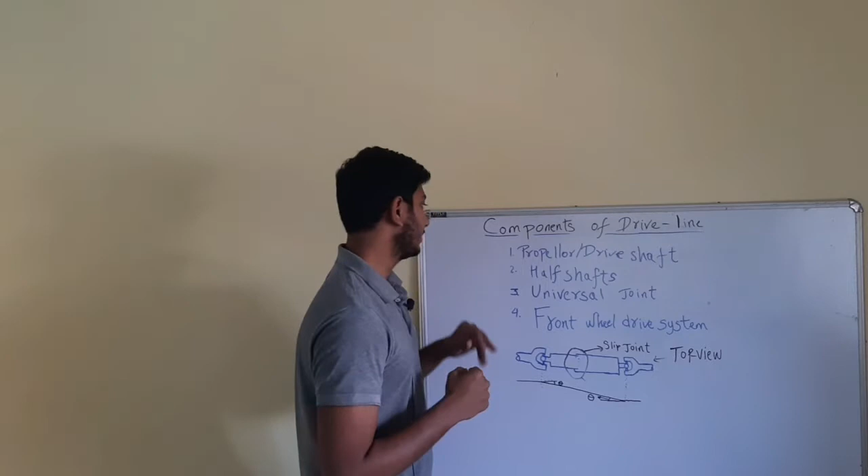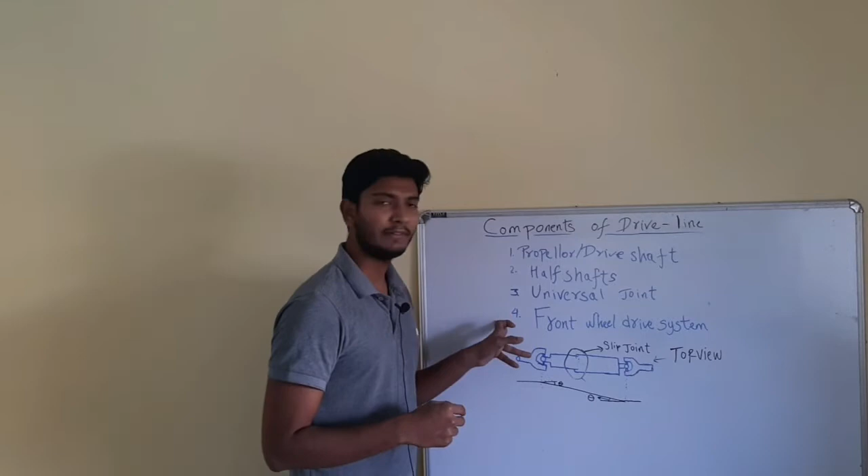So today we will be discussing about propeller shaft or drive shaft. It is commonly known as drive shaft. Then the second component is half shafts. Third one is the universal joint. Fourth one is the front wheel drive system. I will just give a gist of front wheel drive system, and this is the part of a driveline system which I will be explaining to you. So let us start with the propeller shaft or drive shaft.

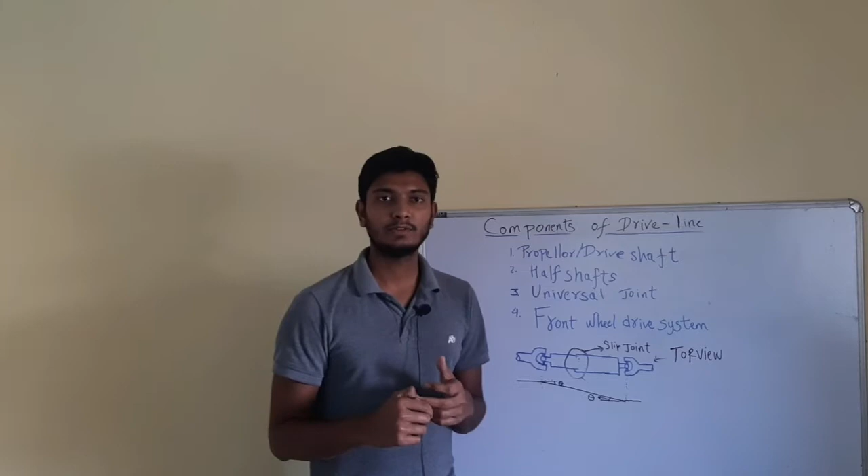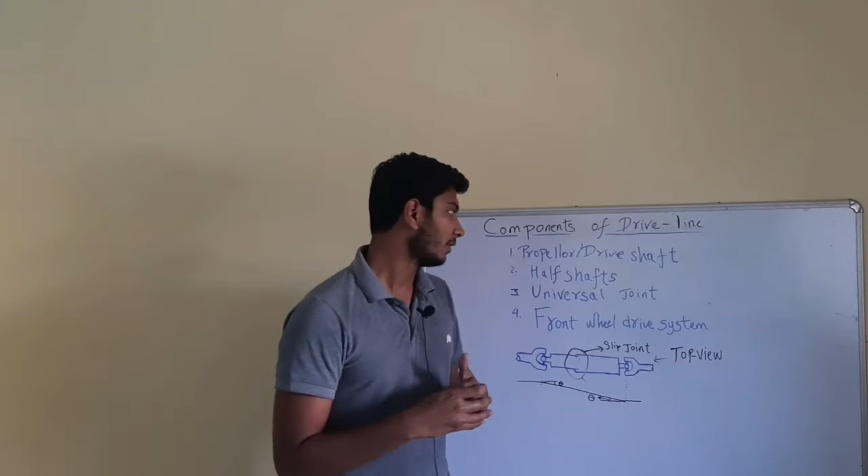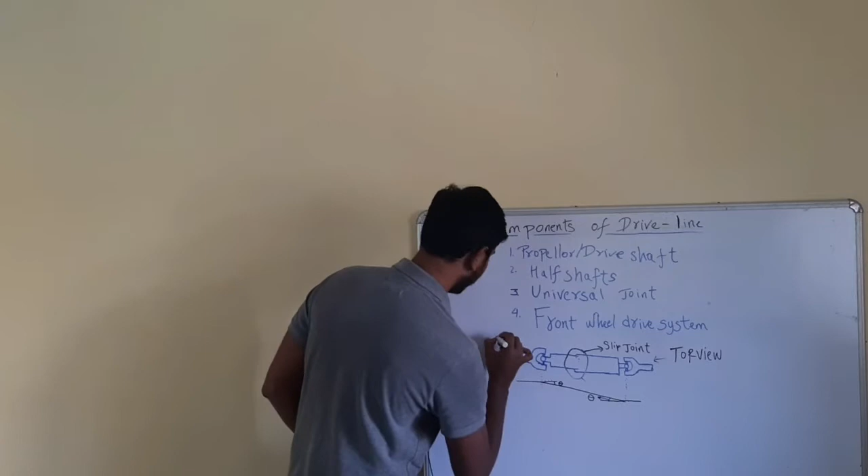A propeller shaft is a component which connects the gearbox and the differential system or the final drive system. So this is the main component which joins both the ends of the system. So let us see the construction of this. This side, let us assume that it is the gearbox side, and this is the final drive side.

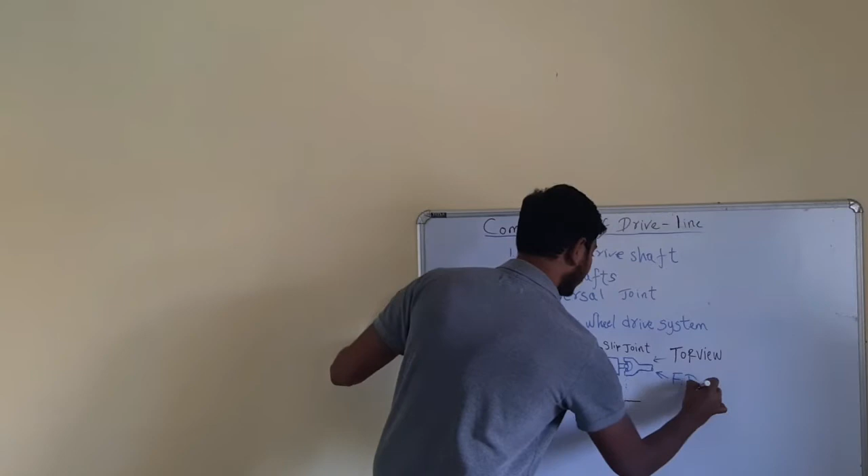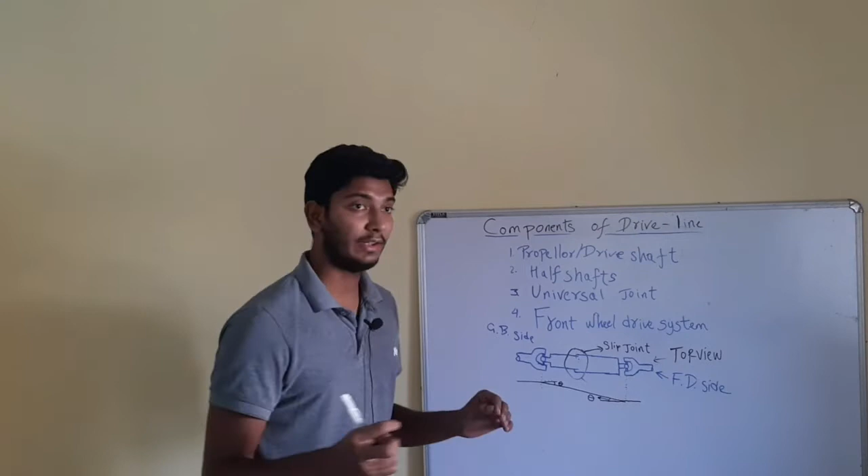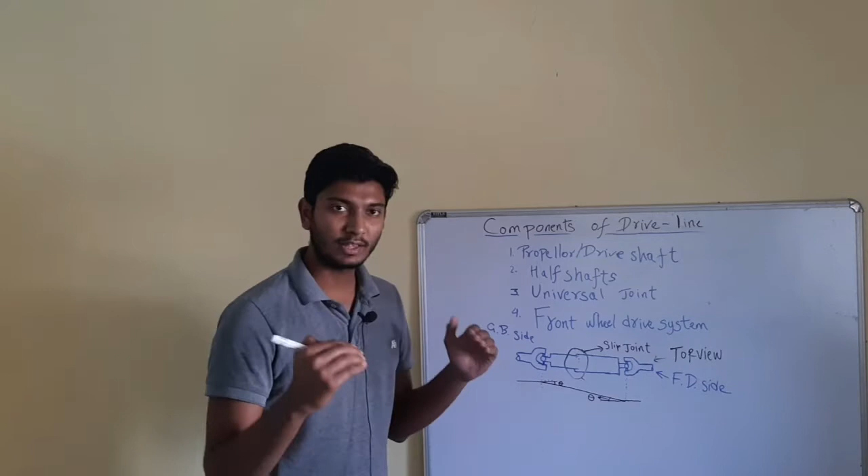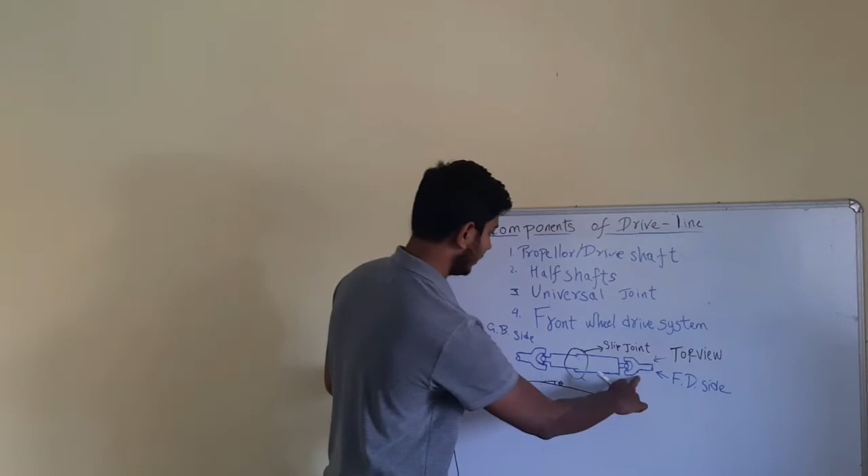So this is the gearbox side and this is the final drive side. Okay, and this is the whole construction of propeller shaft. Now, if we imagine that the wheels are on the ground and the gearbox is on the higher side from the ground, then they both are parallel, but it is not possible for a shaft to connect this way or in transverse way. So they have used two universal joints on both the sides, so that we can transfer the power.

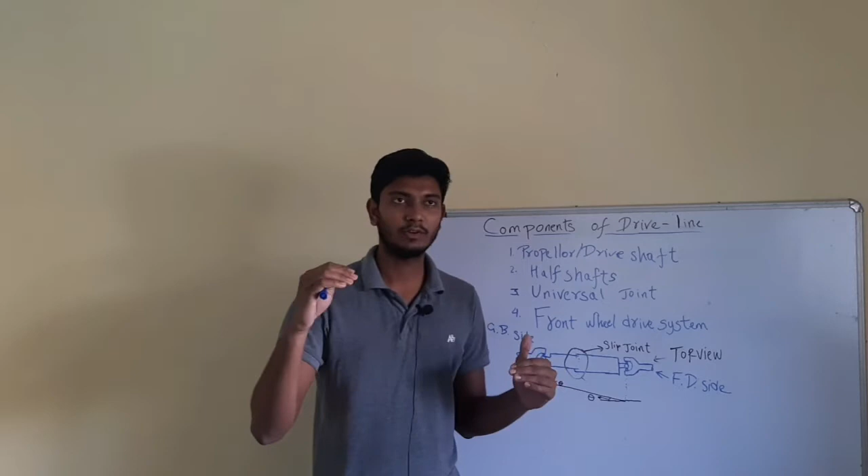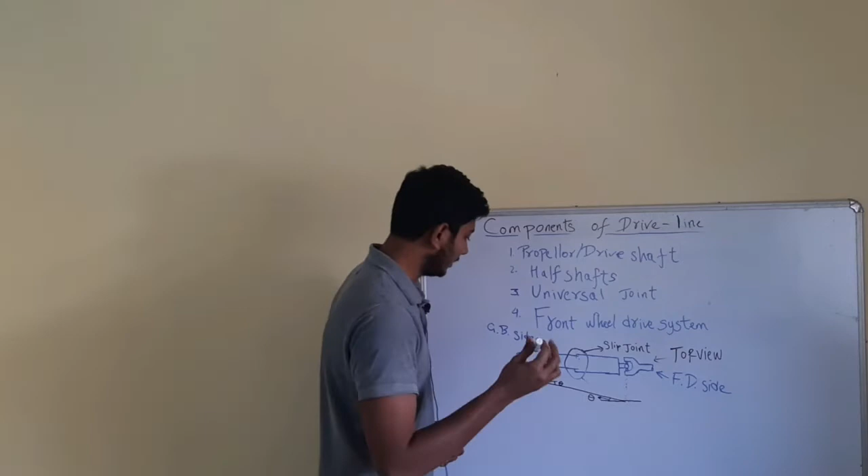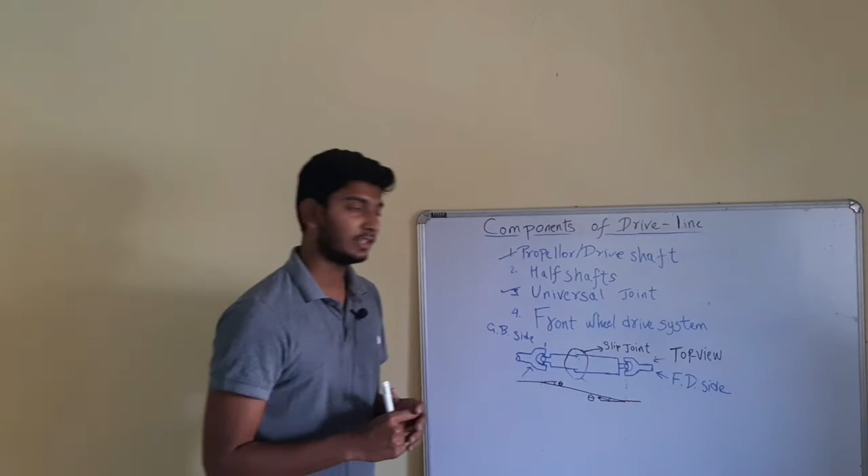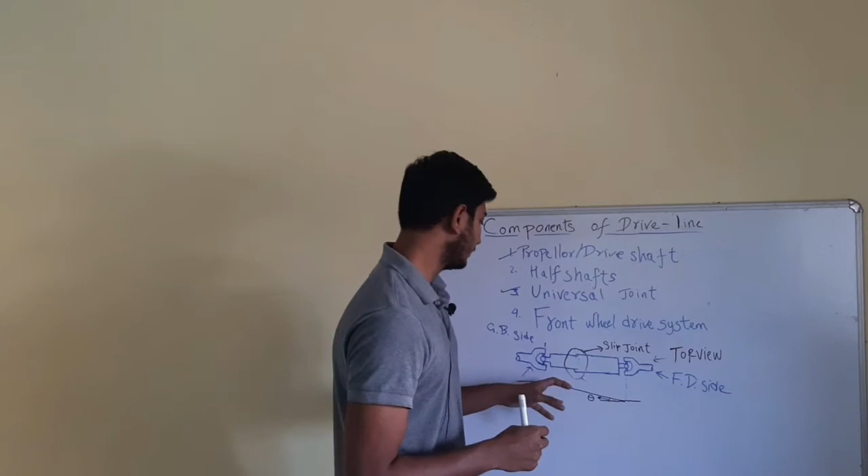Both these sides are offset at some distance. So both these joints allow the power to be delivered from one parallel line to another parallel line. Okay, so this is a fork-like structure. This is the universal joint, and this whole is known as the propeller shaft. Now, both these angles should always be constant. Otherwise, we would be finding the speed difference. We would not get the desired output of the speed which we want. So for that, both these angles should be constant or should be equal.

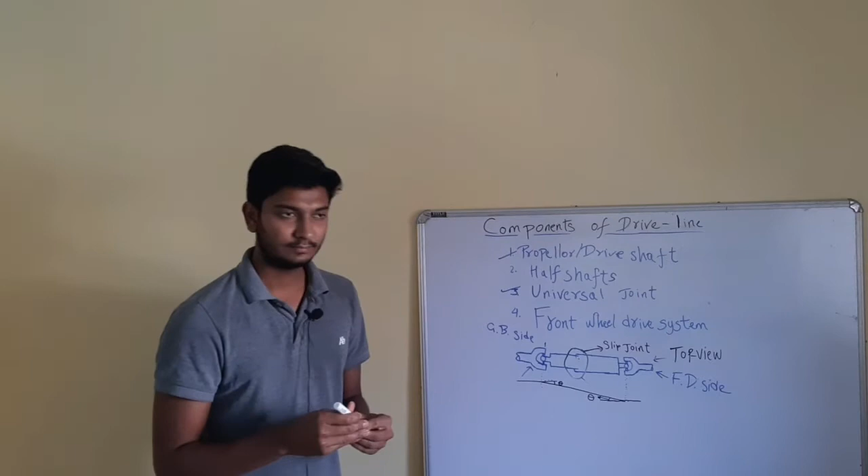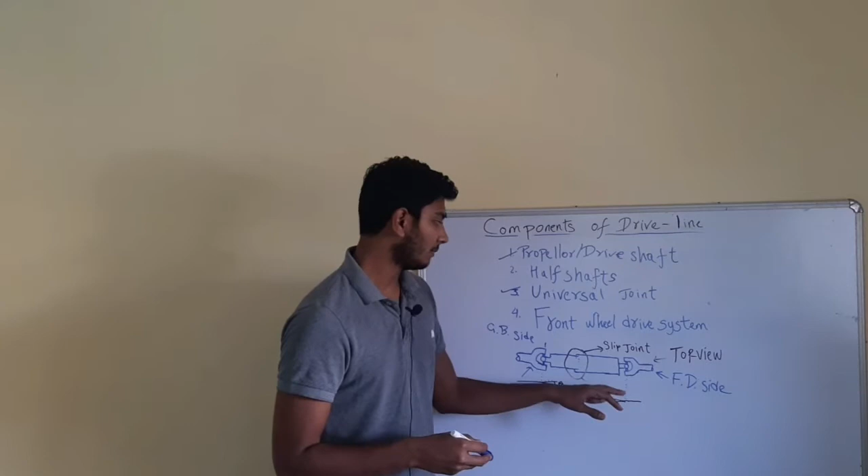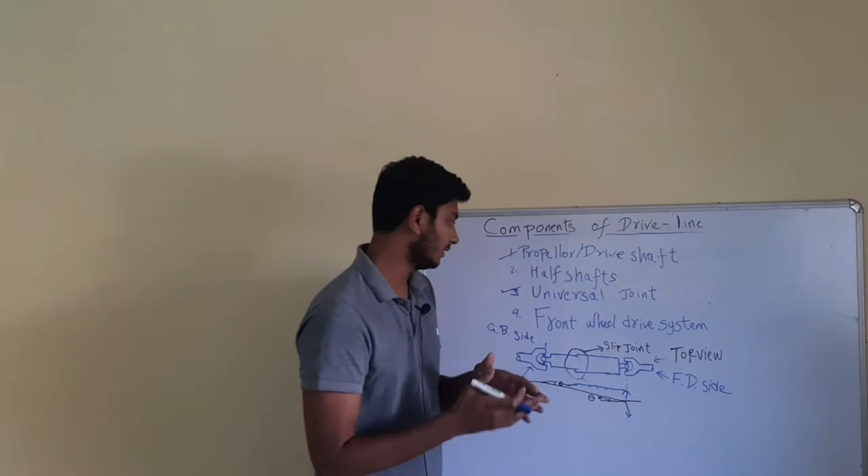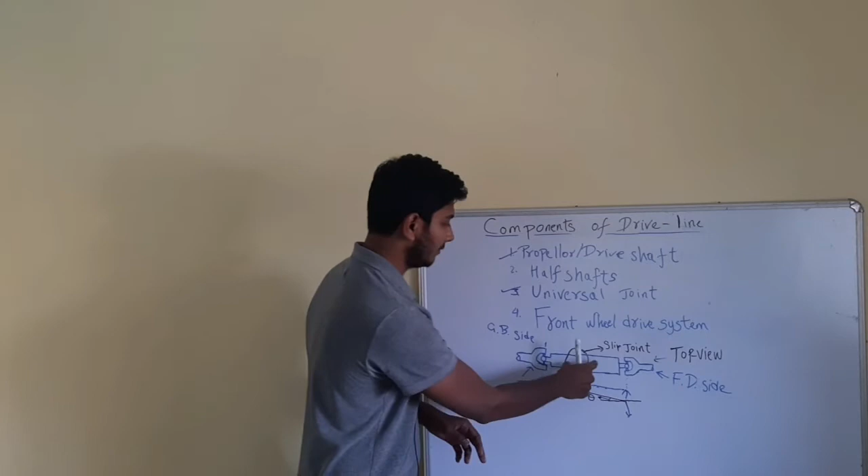Now, another thing, we have seen that the wheels of the vehicle constantly move according to the potholes and many other deformities of the road. So what about that? This will always be traveling in this confined path only. So if there is a bump, this would move upside, then this would be the shaft. Now this length and this length would definitely be different. So for the compensation of this length reduction, and to keep these wheels in the same plane, we have introduced a slip joint in between both these universal joints, which is the propeller shaft itself.

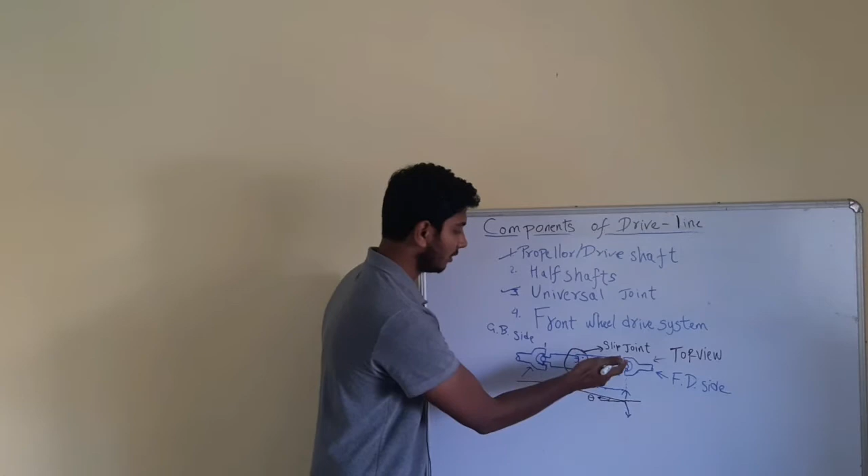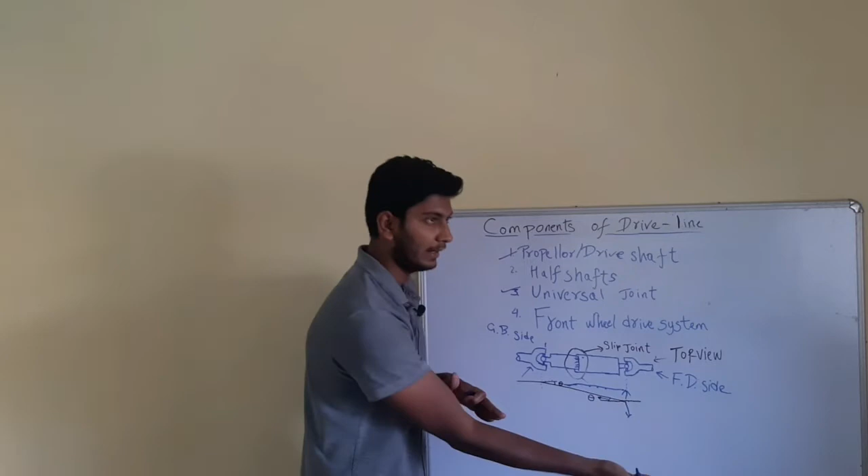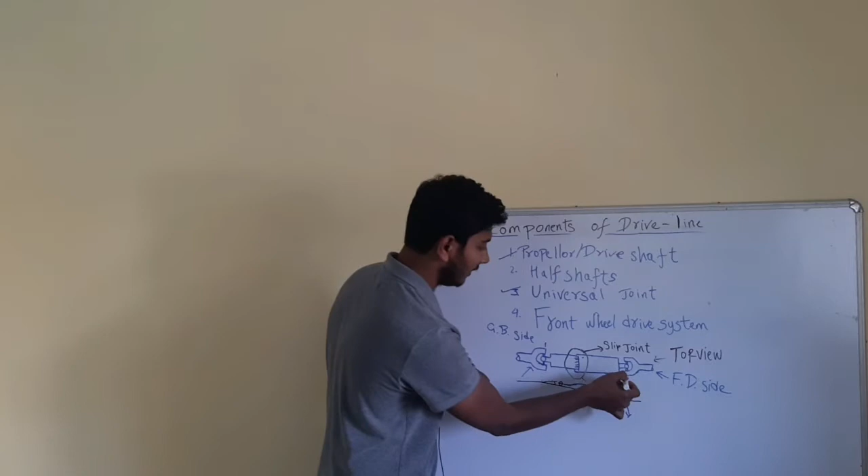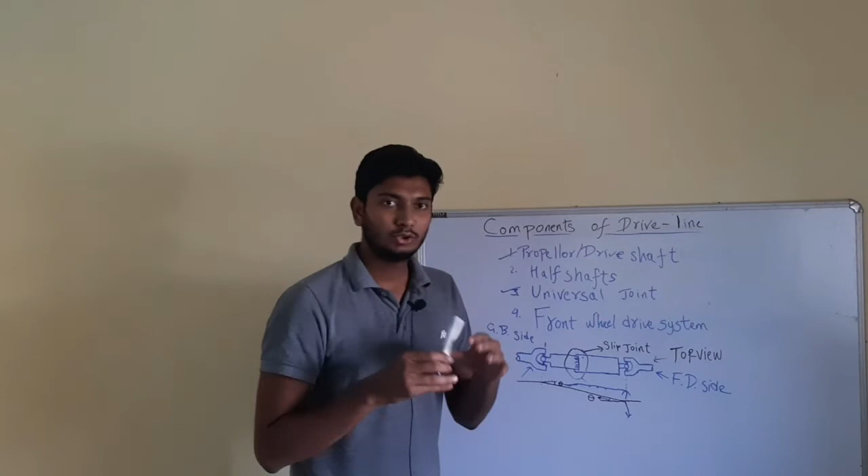Now here, this side of the propeller shaft is solid and this side is hollow. For simplicity, for this diagram only, in real life it may be different. So this is the solid side, and this is the hollow side. Now, if there is any bump in the road, then the wheel would lift up. So this shaft will also lift up, and this structure is like a sliding joint. It's like two shafts sliding over each other with the help of this structure, known as spline structure.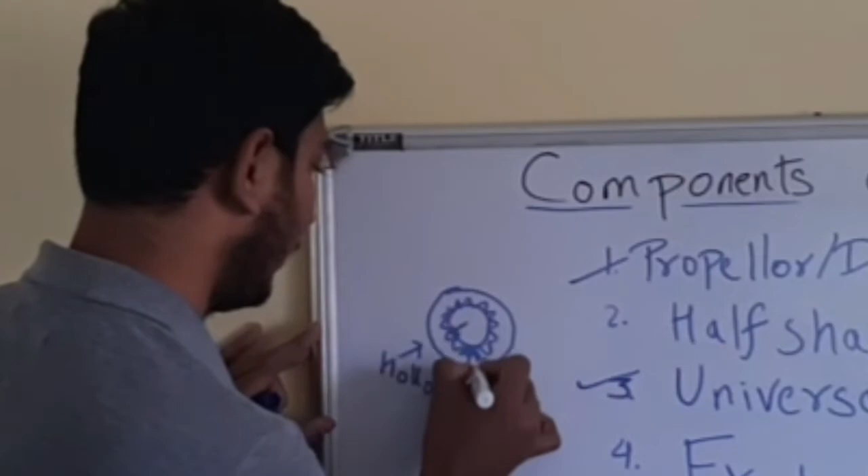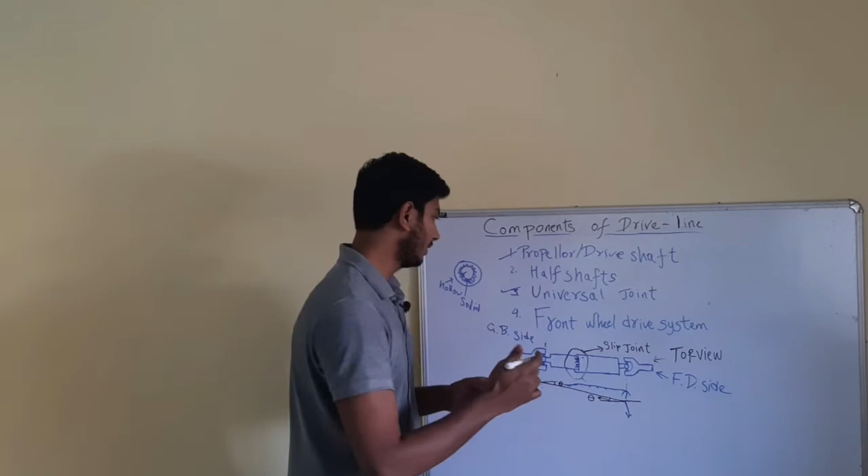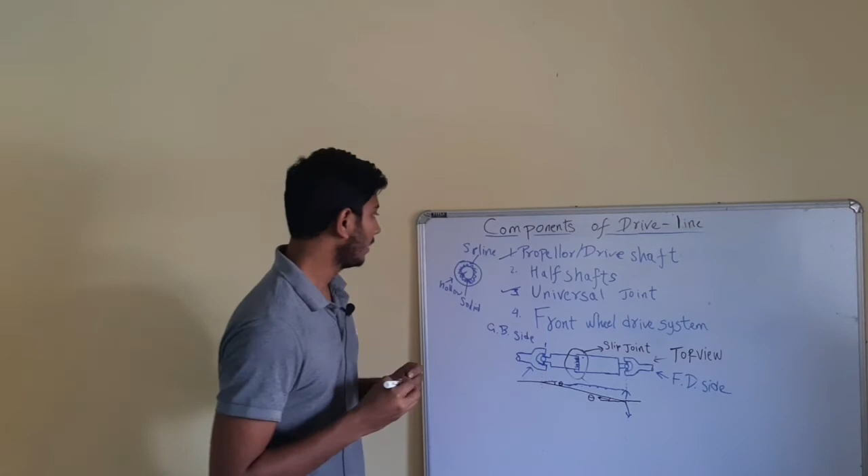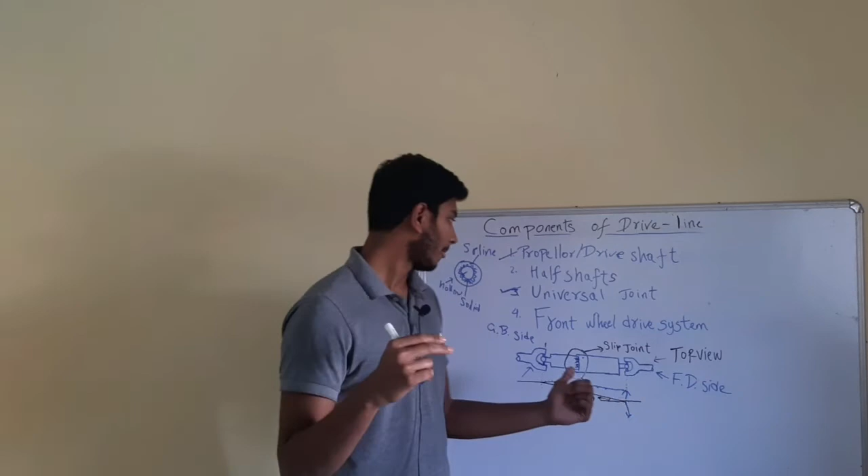Let me draw it here. This is the solid one, and this is the hollow one. This solid and hollow both have gear-like structure over its body. This gear-like structure helps to deliver the power due to rotation. If this structure would not be there, the solid shaft would simply slip inside the hollow shaft, and there would be no power delivery. This structure is known as spline. So here we complete our drive shaft or propeller shaft and the universal joints. The importance of drive shaft: to deliver the power from gearbox to the final drive, and the universal joints to connect two non-parallel power delivery stations.

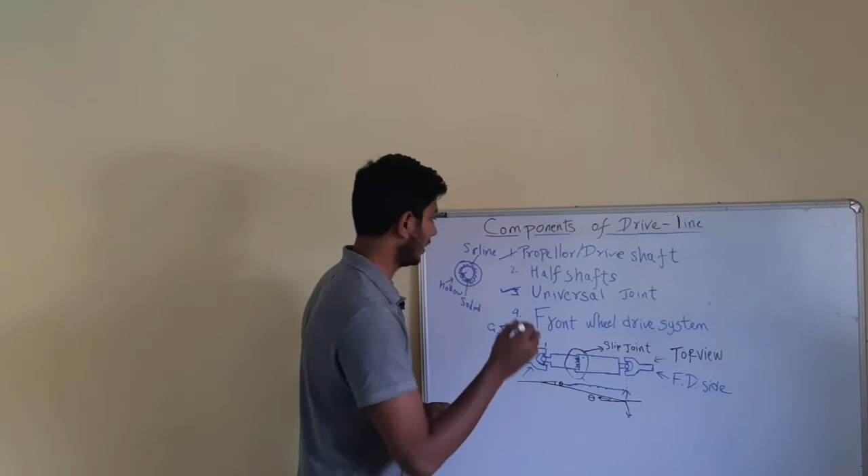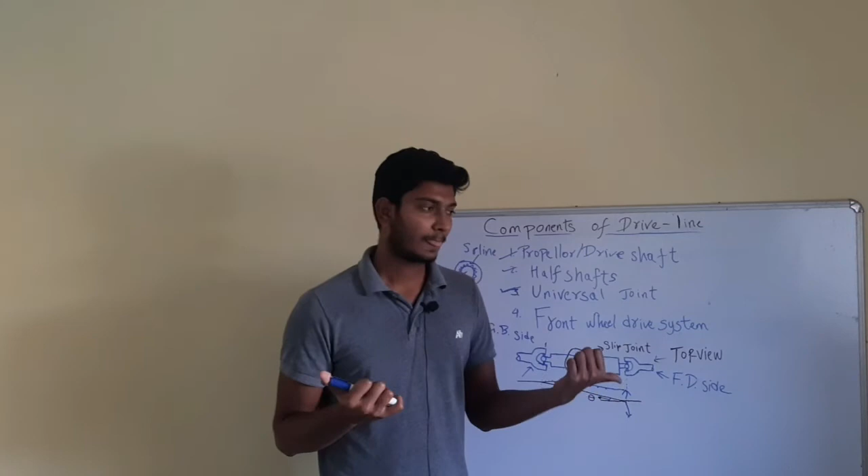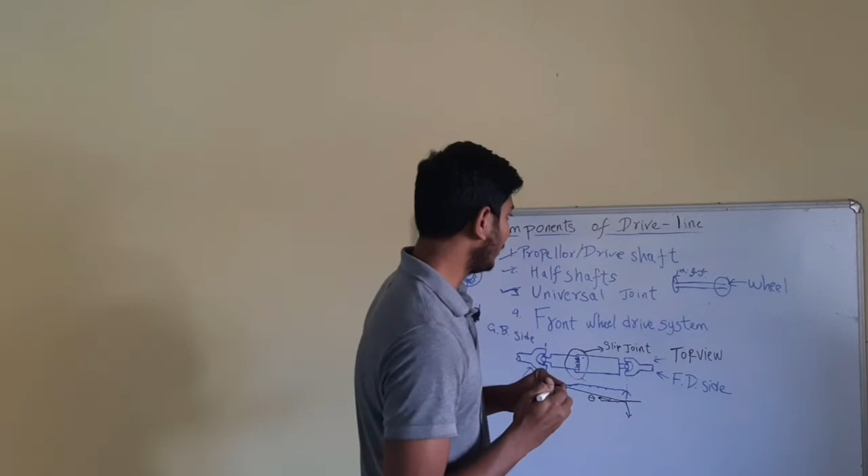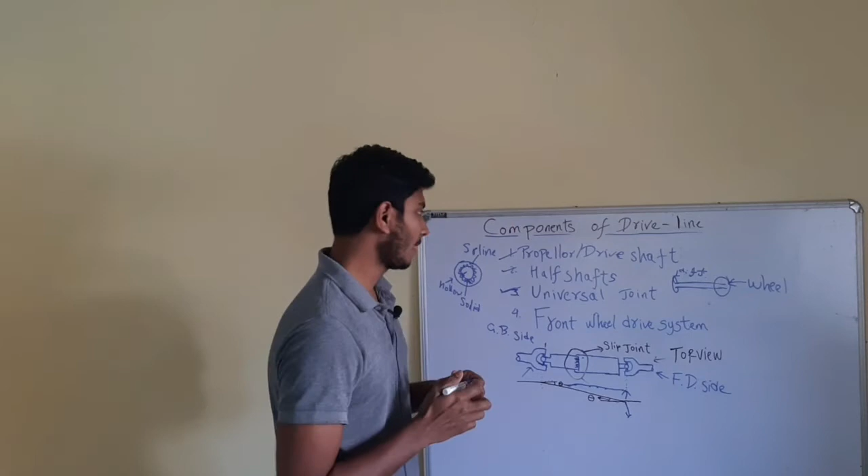Now, half shafts. We have seen in the previous video of differential system that there are two half shafts running on each side of the vehicle. The half shafts are simply shafts inside the axle housing, or they itself may be axles. Let us assume this side is connected to differential, and this may be connected to wheel. Both the sides are having a CV joint or constant velocity joint. I cannot draw it here because it's a very complex drawing. You may refer it on Google, and it is a very important component because the CV joint is also used in the front wheel drive system.

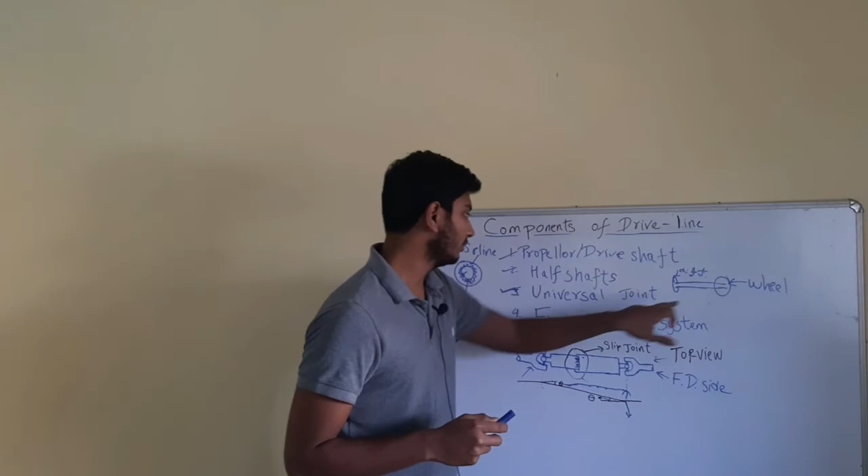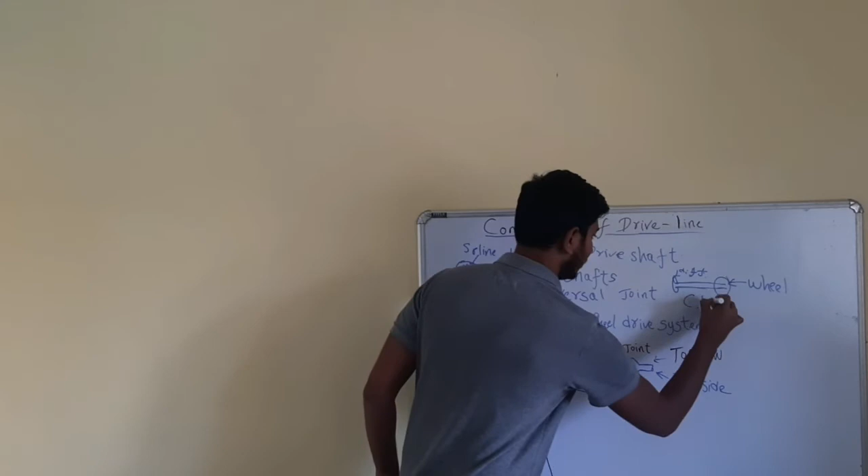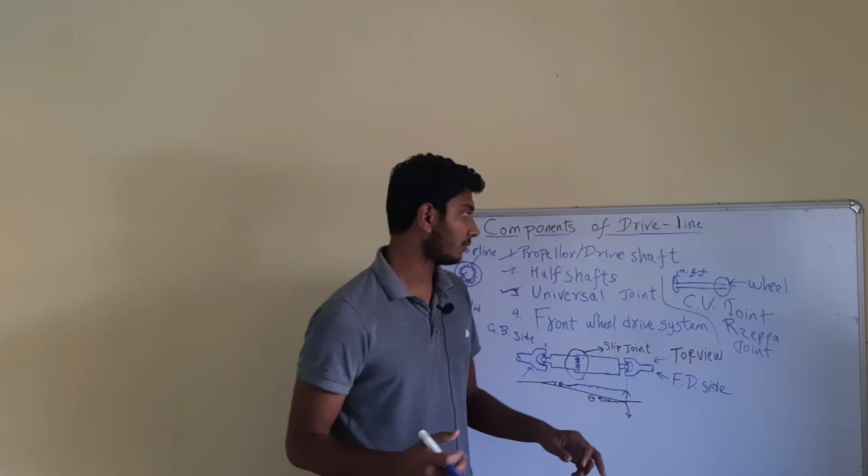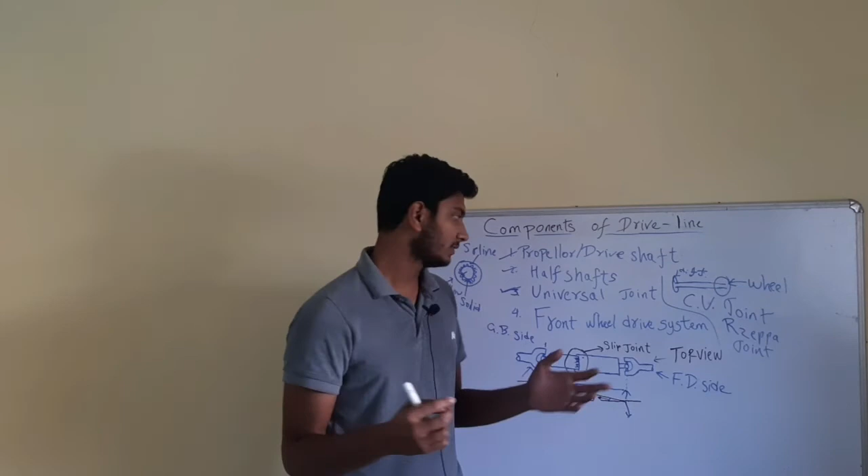Let me write it down here. CV joint, also known as Rzeppa joint. So do check out this Rzeppa joint or CV joint. You will definitely explore many more things of this automobile system, because this is a very important component. Without this, front wheel drive system and many other systems would be useless. I cannot say useless, but it's a very important component.

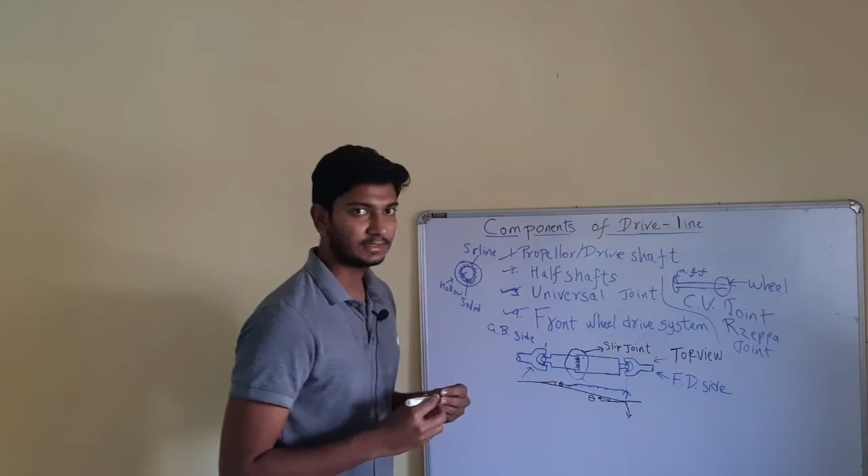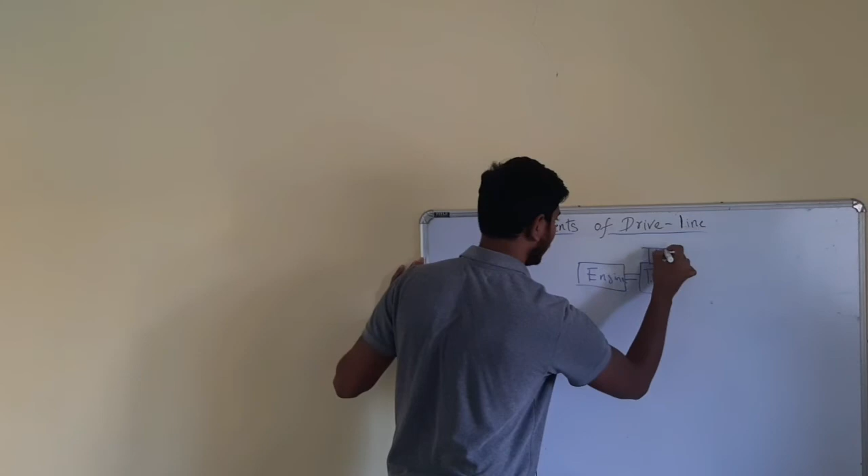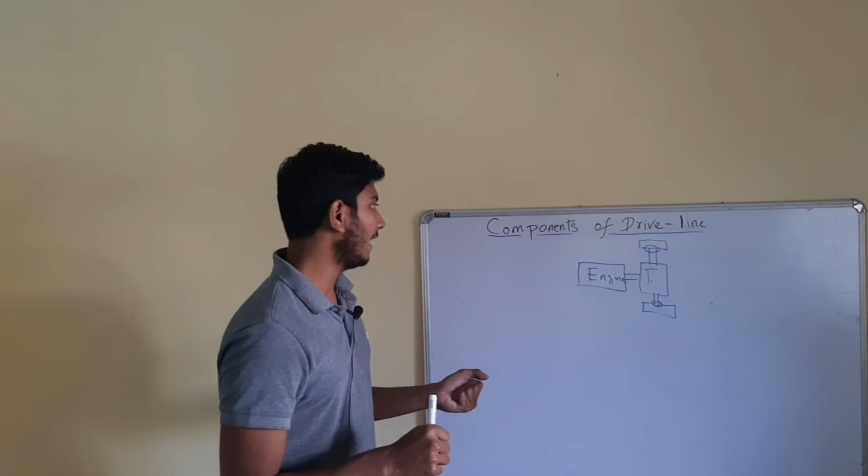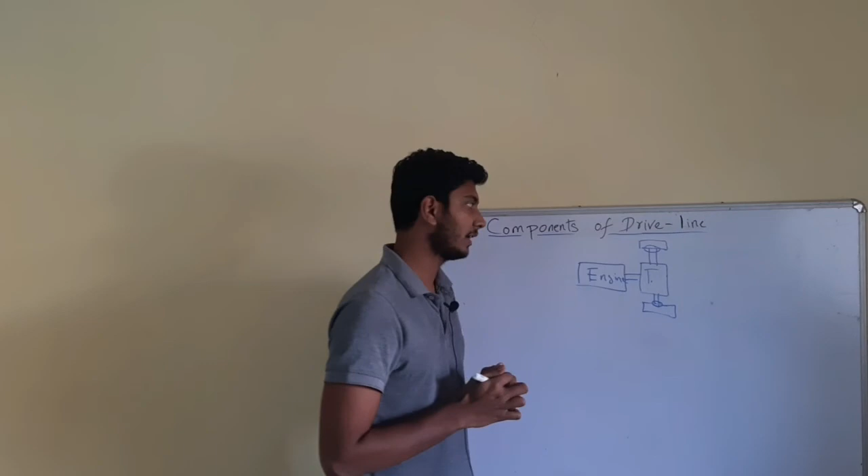So definitely do check out. We will do another video for front wheel drive system. I know I have not explained it enough, but we will definitely try to do this better in another video.